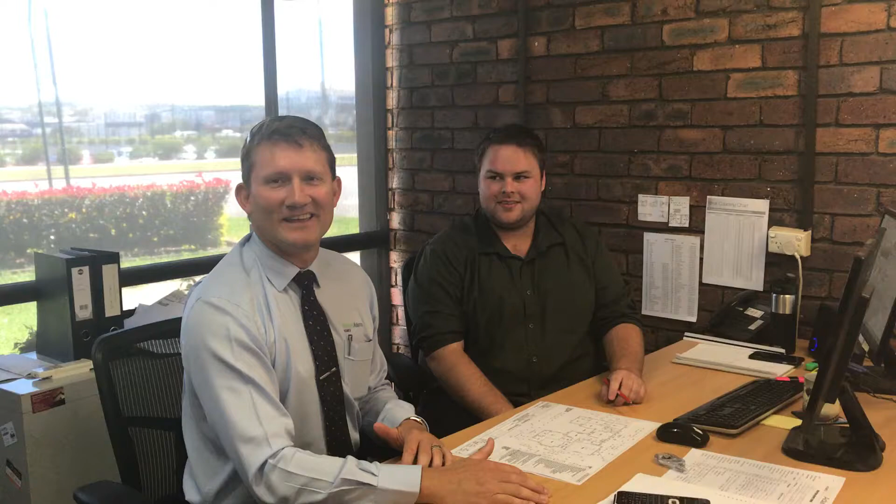Good, good. It's great having our own draftsman in-house. The benefit is that we can redraw plans, change things around. A lot of the time when we have a meeting with a client, we'll have our plan, but they may want to adjust something, make the ensuite bigger or add cupboards to the garage. So basically the salespeople, or me for example, will make some changes to it with the client and what they want to do.

We then give it to Matty to make it look pretty. He then adjusts things and makes it work. Sometimes it doesn't work, mate, does it? No. If it doesn't work, we've got site restrictions, like side boundary clearances, sewer main to be clear of to the roof, things like that. So I'll try and make it work where I can. If I can't make it work, I'll come back to you.

Sometimes we'll just draw a shower, a vanity and a door, and it may not work in that size area because you've got to have a certain amount of room for a toilet or a door. So Matt then makes it work, juggles things around. We bring that back to you, the client, and show you to make sure you're happy with it, so you can add your personal touch, which is fantastic.

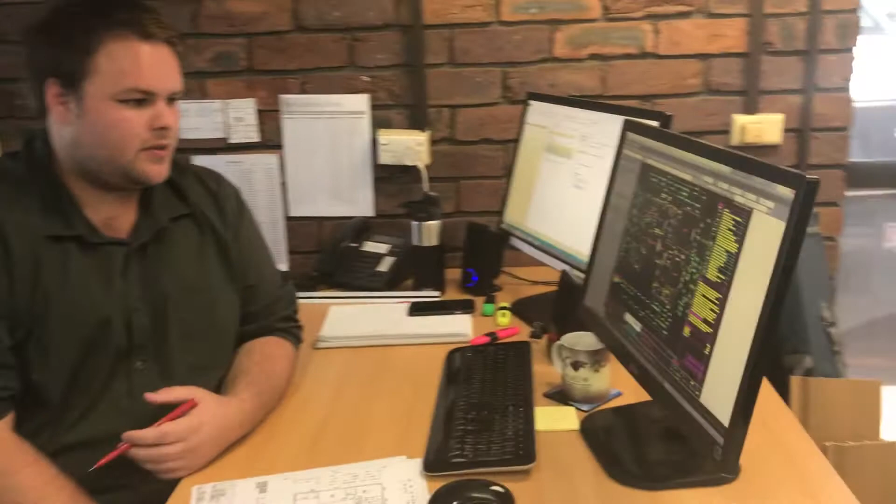This is what it looks like up on the screen, this is how it's all drawn up. As you can see, pretty basic. Once we get the changes made to that plan, like adding gas bottles and that type of thing, it's all shown, pretty easy to read once it's all printed out.

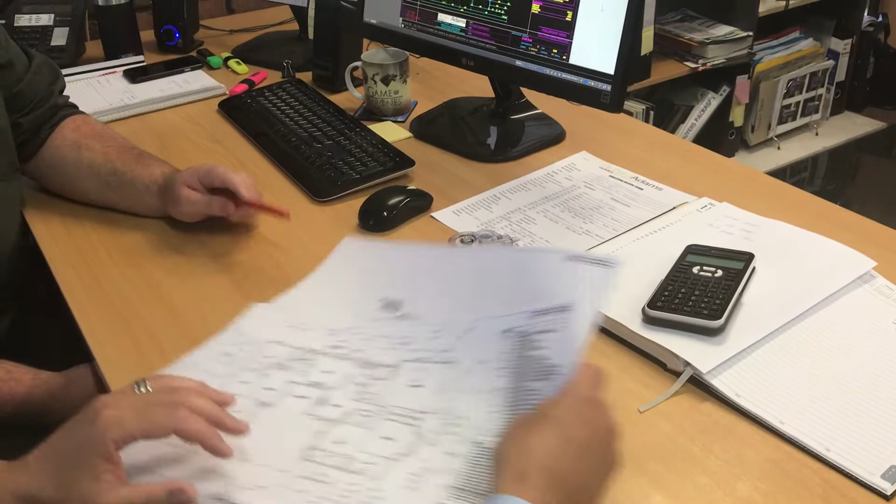So it's similar to this once it comes out of the printer. Quite easy to read, all the info's there in the legend. This is an elevation for this project behind. Get it back to the client, go through it, make sure they're happy, and then we go to full drawings. Correct, yes, like I said.

Right, so run through these for us. Pretty much, so this is your site plan. Shows the building, shows all your boundaries, street, etc. These dimensions here are for the guys to do their site set out. And that's pretty much all there is to a site plan.

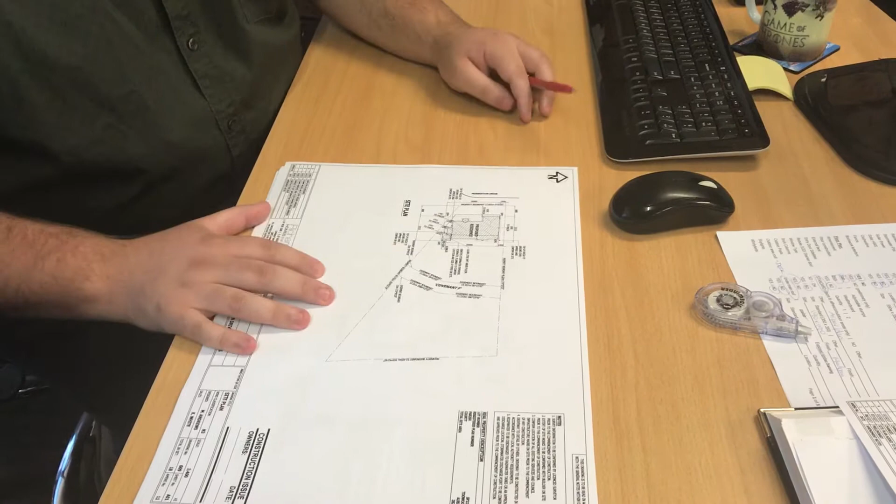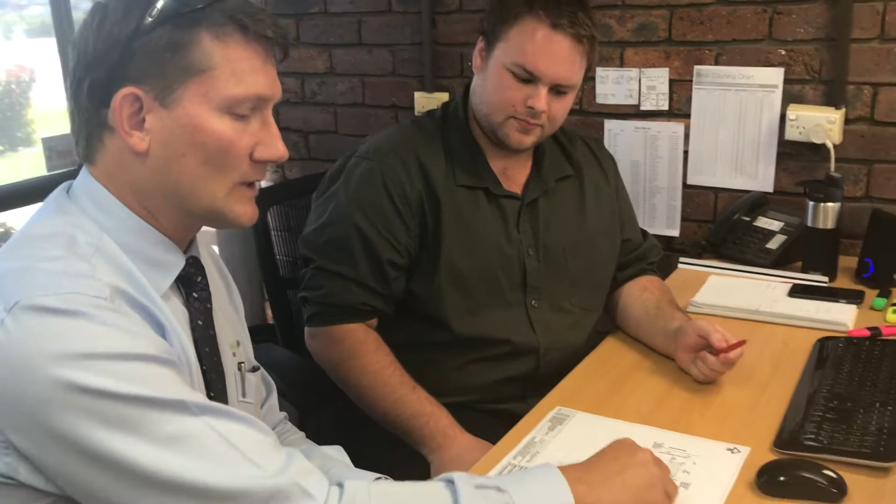Pretty basic, but it's really good because it gives you a perception of the size of the house on the block and how much room you've got. If you're doing a shed, we'll actually position a shed and a pool so you can see how much room you've got because it's all to scale, which is really good. I find that really handy. What else you got there, mate?

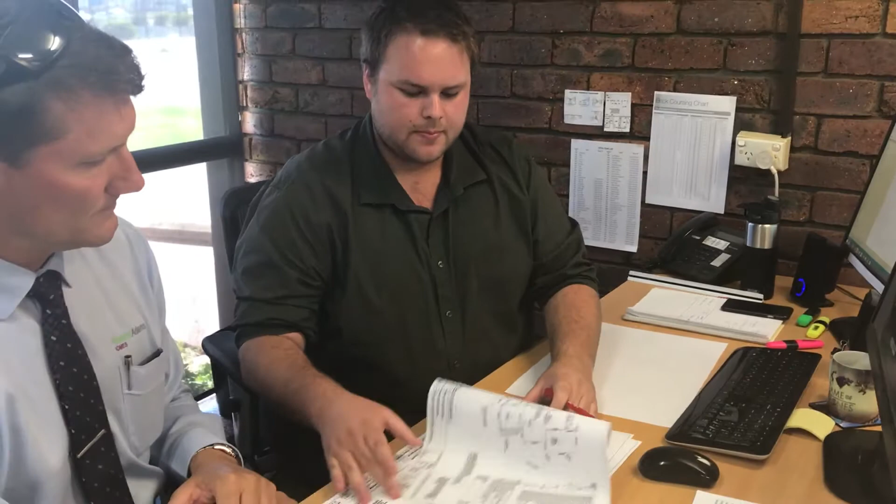So this is a pretty big home, this is your floor plan with lesser dimensions. The one we showed before had all the dimensions on it. Basically the same setup, showing all the information, walls, doors, things like that. This plan here is a dimension plan for the carpenters to do their thing, put all the walls in. Then we go to our elevations.

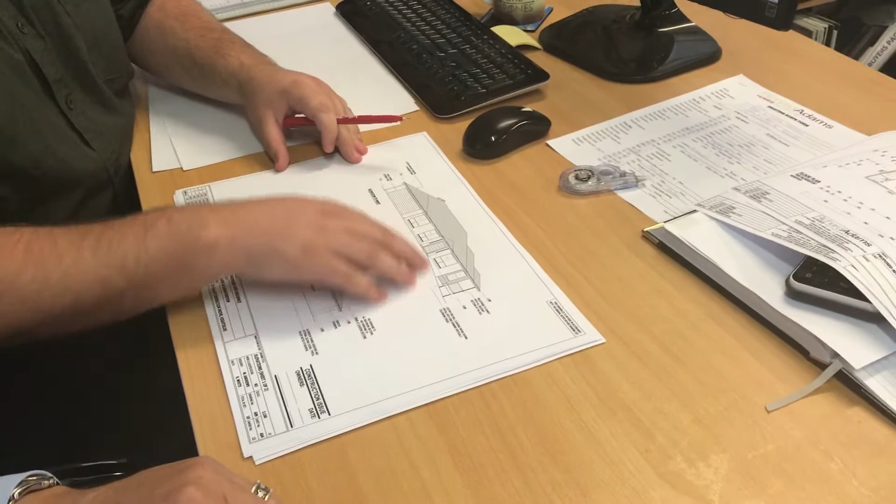So this is a stump home. The front of it was basically at ground level, the garage on slab obviously. You can see around the side here, the site started to slope away. So the back of it drops down about 3 metres. That's the front, it's slab on ground brick, and then around the sides Colorbond.

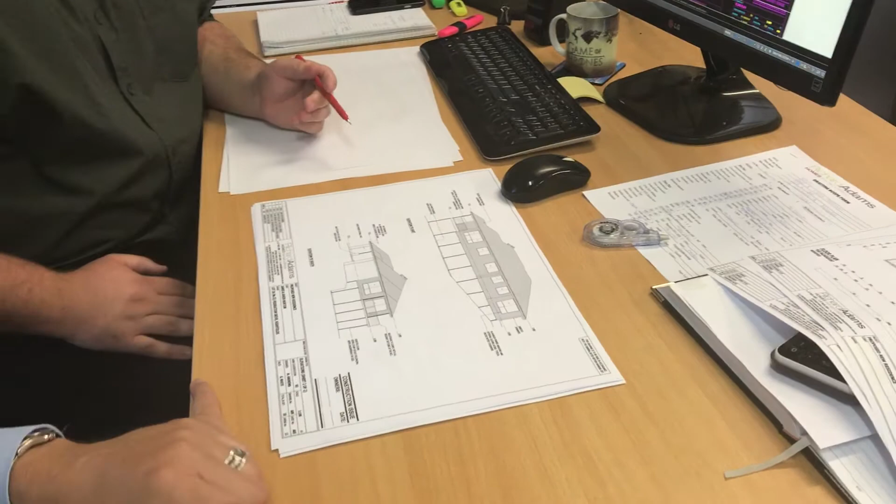Yep, and then at the back, flip him over. At the back, it's about 3 metres out of the ground. You can see it's up on stumps, and there's a timber deck, and then this is all back to brick. So this is a split level home we're doing. That's basically just to show the tradies what the home will look like once it's finished, and the client as well, so they can see what they're getting as a final product.

This is just a section through the home. Nothing really there that the client needs to worry about. It's just to explain to the trades what's going where, retaining wall under the home, things like that.

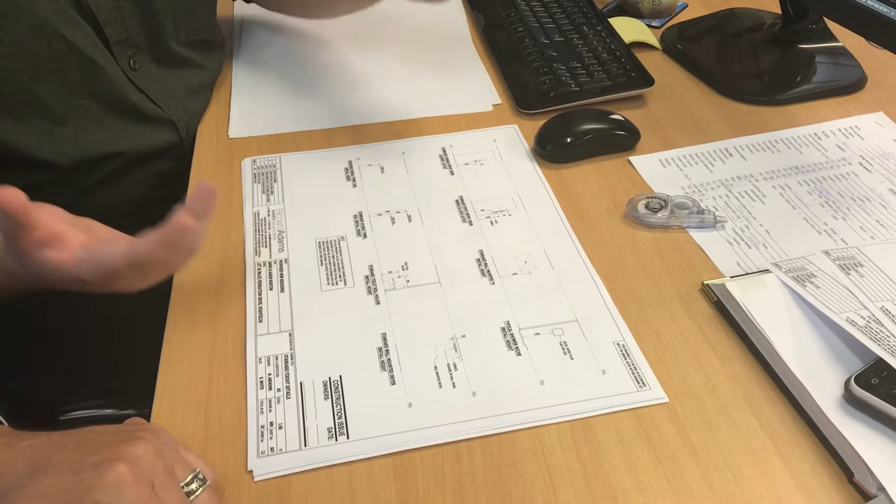This is our standard fix-out details for the carpenters. So it's just if they need to put noggins in for your wall-mounted TV, towel rails, toilet roll holders, the essentials, where things are going to be positioned.

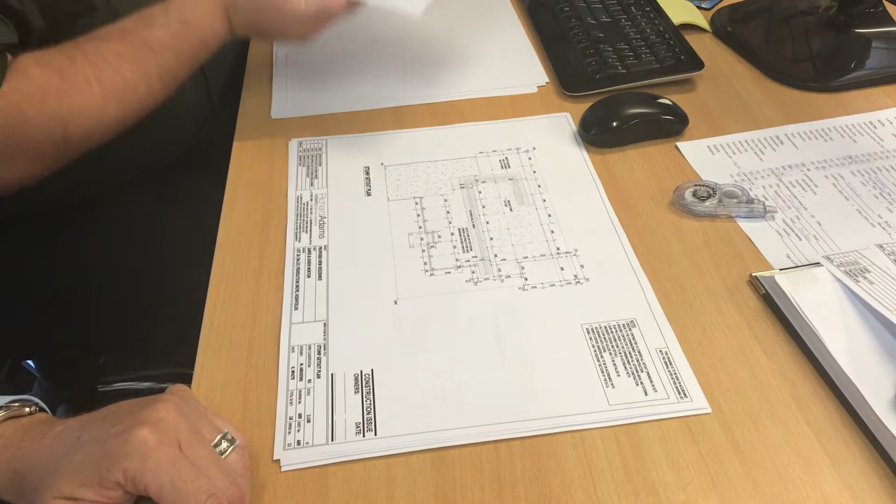This is the stump set out. This home was up on stumps. These little squares you can see here, they're your steel columns - hold your floor up. The reason why this is all done is so that it meets the building code. We meet and exceed the building code, but this is helping the people on site, the contractors, to make sure they know where things go.

What else have we got, mate? This is your floor framing, so I've nominated your bearers, your joists, once again for the chippies to do their thing. Pretty basic - this one has a hardwood deck on it because it's exposed to the elements, things like that. So that's pretty standard.

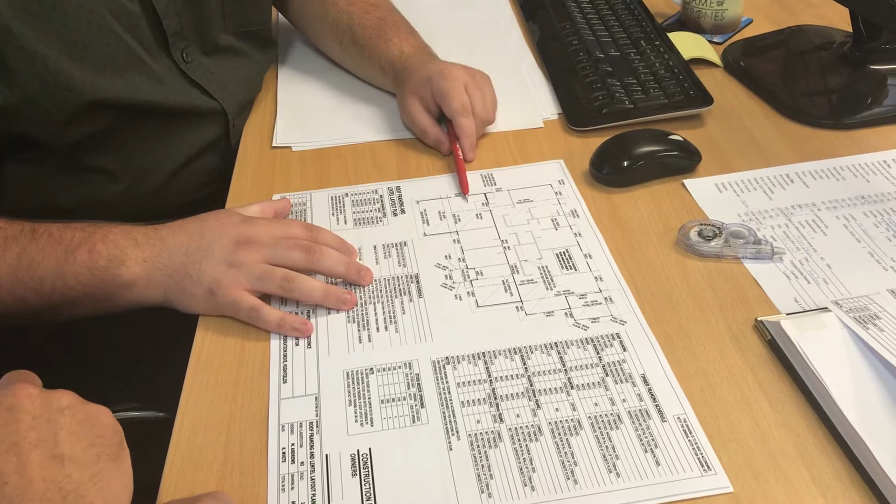Once again, carpenter plans. This is your roof framing and wall framing layout. So I've nominated your load bearing walls. There's really not much here to explain, it's just so the carpenters know what they're doing.

Wall bracing, that's to your Australian standard, so your house doesn't blow over. Showing where we're putting the bracing. So that's them all here.

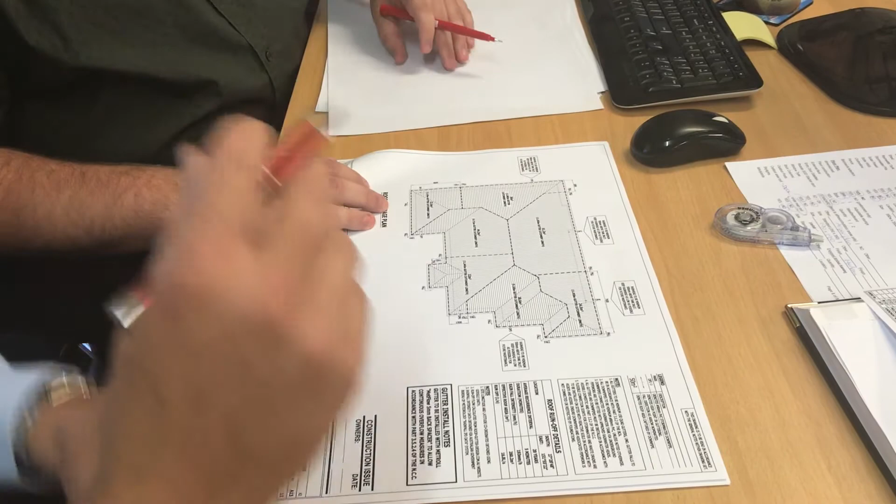Roof drainage - how much area of roof's going to your downpipe. A lot of this is for council, because council and building code have certain requirements on how much square meterage can go into a downpipe. So we've got to prove to council that we're doing that, and it meets the code.

Downpipe set out, just to make the plumber's life easier, showing them where the downpipe's going up the wall, things like that - so just a minimum from the corner. And we try to keep them away from the front entry, so you don't want to be walking into a downpipe at the front or at the back where you're living. We try to keep them out of sight.

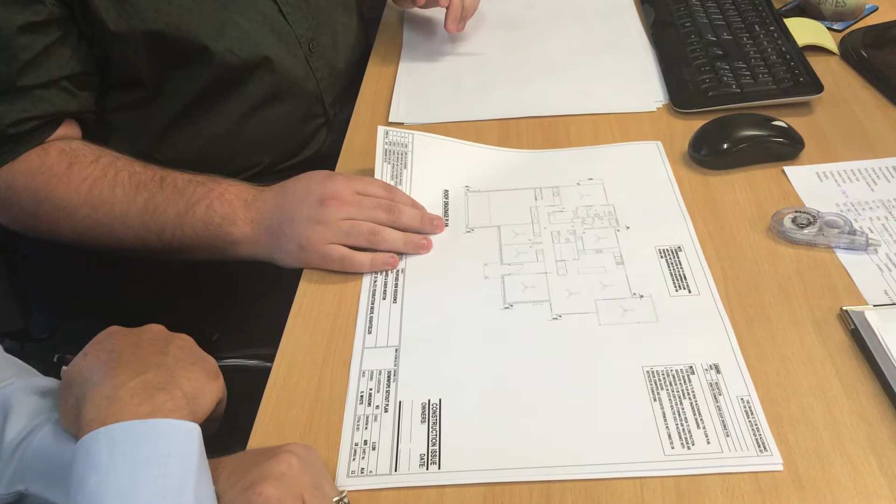That's the last page. So there's a bit to it, as you can see. There's about 13 pages that get done.

So Matty does that. Mate, look, thanks for your time. No worries, thanks for coming around. I'll let you get back to drawing plans. Yeah, cheers, thanks mate. See ya, see ya.